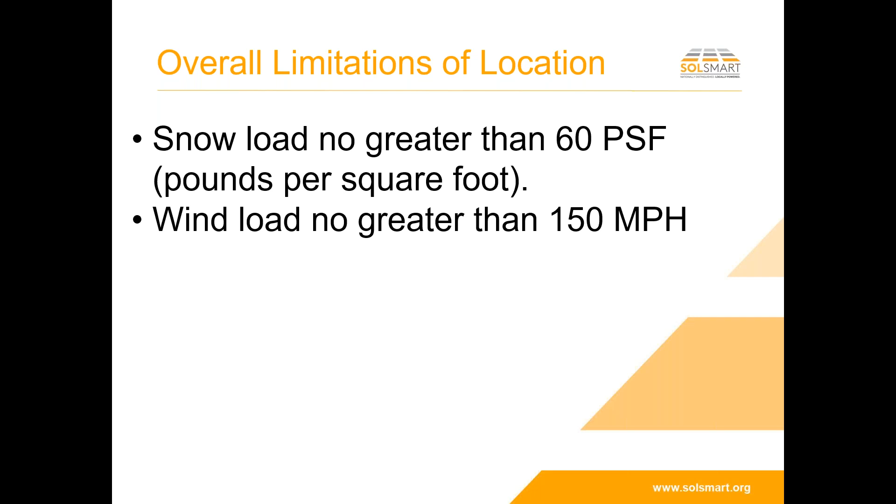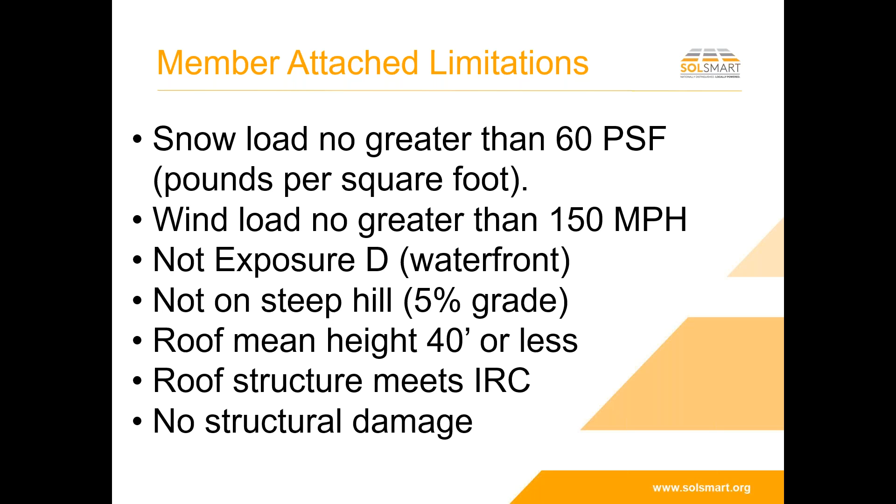The roof structure meets the IRC, which on older construction may or may not be obvious. And then there's no structural damage or modifications that have been made. So a lot of this stuff is structural.

We'll kind of move through this - my intention is not to make you structural engineers or structural reviewers. We may have some structural people on the phone and they'll love this stuff, the rest of you are going to be bored out of your mind. So we don't want to overemphasize it, but we just want to show that structural issues, as most people would think, are a big issue in areas like Minnesota where we get a lot of snow. We want to make sure everybody understands that we have those things covered.

Also, we have wind loading issues - these are member attachment requirements, and this is a checklist. The array is set back from roof edges by at least twice the gap under the module. The gap under most PV modules sold today in the racking systems is about 4 or 5 inches off the roof deck - that's kind of the optimal height. So if you're 4 or 5 inches off the roof deck, you're going to be a minimum of 8 to 10 inches away from the bitter edge of the roof. That's because of wind loading issues - there may be some benefit for icing and things like that, but it's really mostly wind loading issues why we require that, because of some high wind vortexes that happen right at the edges of roofs.

We're also saying that the array can't be cantilevered over the perimeter anchors more than 19 inches. Often we will overhang our rails a little bit over the edges of our last anchor. The perimeter anchors are the ones we really care about from a snow loading point of view, primarily - it's the force of the snow pushing down and how much weight it's going to exert on the rafters or trusses along that perimeter.

All right, now the upslope, downslope anchor spacing, we'll get into, again, some examples to help you understand all this. The spacing of how far apart the rails are that the modules are mounted on is really a function of the module manufacturer's instructions, not the rail manufacturer's instructions. So the rail manufacturer is going to say, hey, they can handle any of these types of modules that are on the market. There's a lot of similarities in solar panels.

And then the module manufacturers will say, well, if you're worried about 50, 60 pound per square foot snow loads, then you have to mount the rails 3 feet apart or 3.5 feet apart. Those are typical numbers. And that you need to have about a 1 foot overhang on either end of the rail, and that will support the module most evenly so that the snow that collects on the panels will not damage the panels.

Now I live in California, and I know people in California don't know anything about snow, and where I live, it never snows. But I just visited snow last week, and I went up to Lake Tahoe, and in the space of 2 days, it snowed 36 inches. So we can get massive amounts of snow, and some of the highest snow loads in the world are near Lake Tahoe. And so snow loading is a real factor, and it certainly is in places like Minnesota where your accumulations tend to continue to collect over time rather than melt away. So we understand that the snow loading is a major factor, and it is certainly in Minnesota.

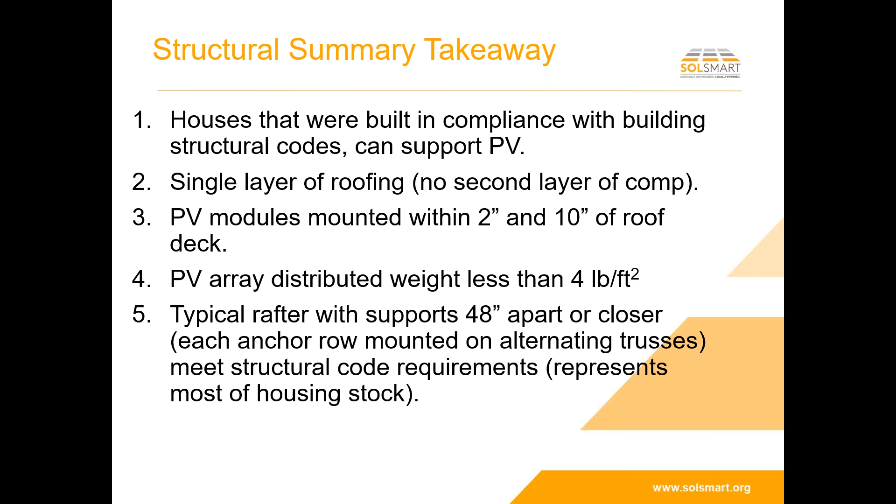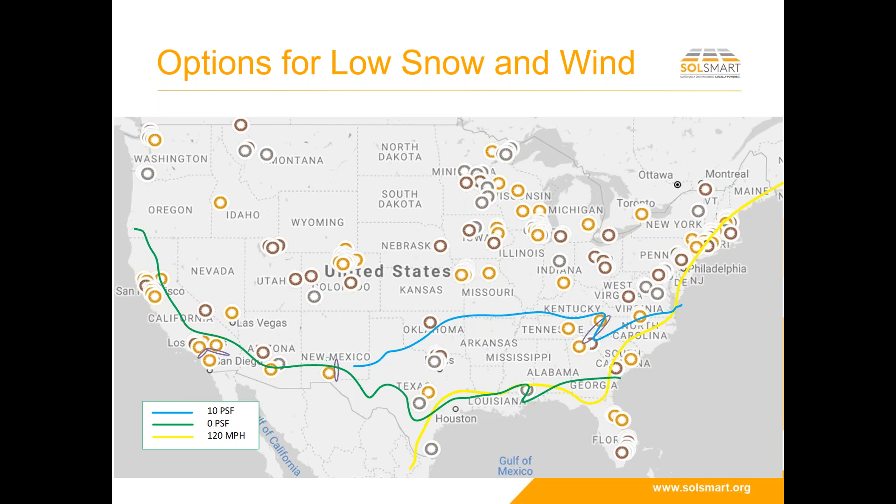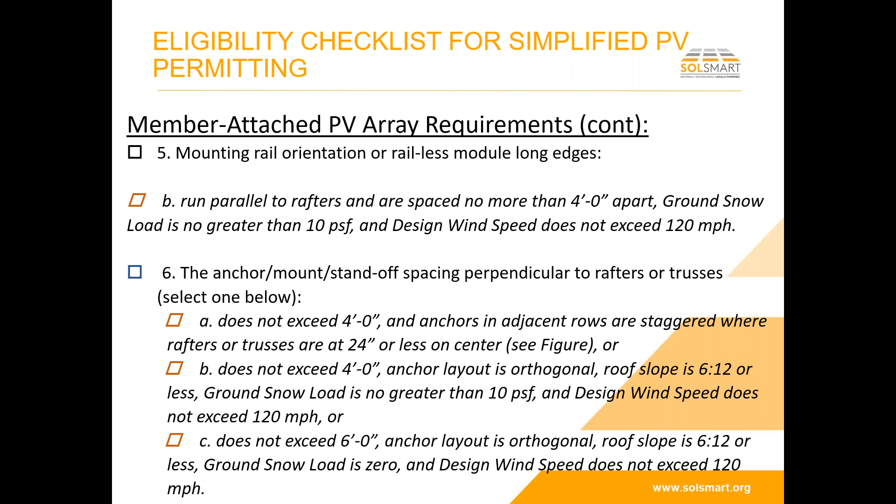The next couple slides I just want to mention, and we're going to move on. There are options in the permitting guidelines for low snow load and wind load areas. Of course, Minnesota would not be considered in that—that's where half of California and the lower part of Arizona and New Mexico fall into that category. These guidelines get into those lower snow load, lower wind load areas, and again, they're not relevant, so I'm just going to skip over them.

I want to talk a little bit about sheathing-attached systems, because they're becoming more and more popular, and we'll see a lot more of these over the next decade. We can handle 60 pounds per square foot snow loads, where the anchors are attached to the sheathing or the roof decking rather than the rafters, going all the way up to 60 pounds per square foot. We back down a little on the wind loading issues, where our roof mean height is a little lower, for wind loading purposes—again, not an issue for Minnesota.

The roof structure, in general, would meet the IRC, as we've talked about before. And if we have manufactured trusses or kiln-dried rafters, then we know the fasteners being used on the trusses are not going to give us any trouble.

There has been some research done in the last decade that suggests using green lumber has caused some issues with the fastening of sheathing, and the code has been revised to clean that up. There is some housing stock out there where green rafters were used, and if the fasteners were number 6, there could be some issues. That's probably not an issue in Minnesota, but again, if you've got a manufactured truss, they're kiln-dried already, and kiln-dried rafters are probably going to be the vast majority of the products out there.

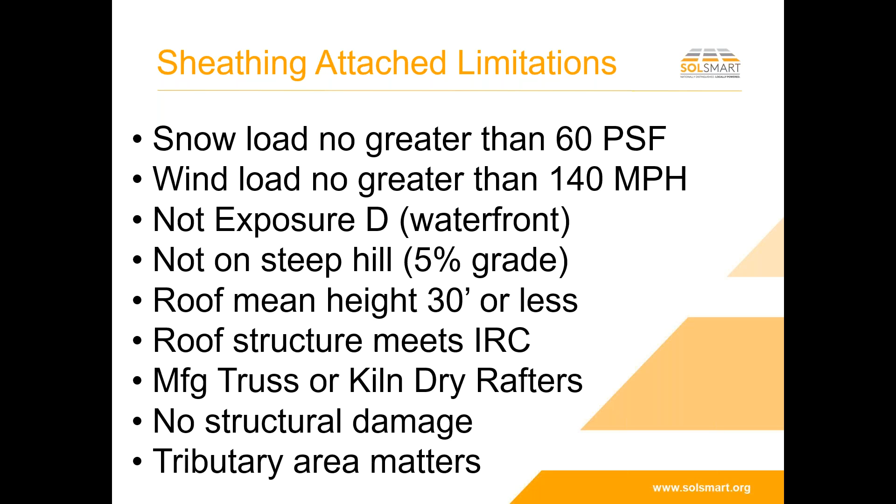There's no structural damage or changes where somebody's modified the structure, and then something called tributary area matters, and we'll go into that briefly without a lot of detail. So sheathing attached systems, for the most part, except in high snow load areas, are going to work for us.

If we look at a sheathing attached system, here we're looking down on top of a house roof with a little gable off the front at the bottom right. What I've shown here is that when we build a roof, we start with full sheets of plywood or OSB, oriented strand board, at the edge of the house, and work our way up to the top, cutting the sheathing at the very ridge.

Measuring from the eave of the roof, we actually know where the sheathing is, and we stagger it as we go up for strength and rigidity. So if we're mounting anchors 2 feet from the bottom edge of the roof, we're right in the middle of a 4-foot by 8-foot sheet of plywood, since these sheets are installed in what we'd call, for paper, a landscape fashion.

If you're in that area near the edge of the roof, that's the strongest part of the sheathing. It's virtually impossible for a system to stay in those bands of strength all the way up the roof unless specifically designed that way. This shows rows of anchors across the bottom here, these little dots. The second row is in bands of strength, but the third row is not. The bands of strength are the middle 16 inches of the 4-foot dimension of a 4x8 sheet of plywood.

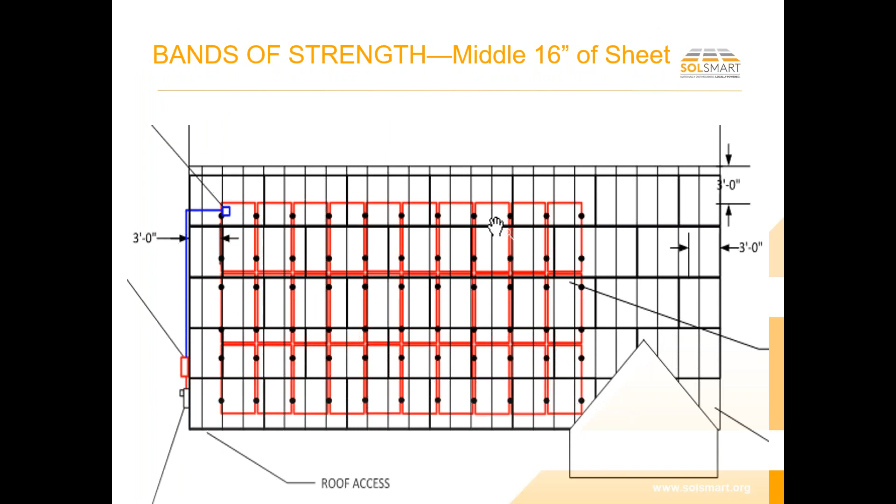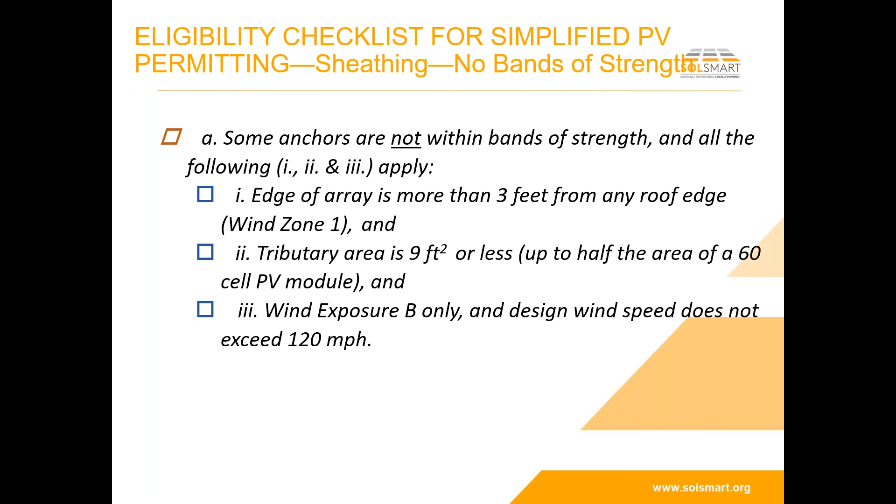If we're not going to pay attention to bands of strength at all, when I mention bands of strength and talk about that middle 16 inches being stronger, the middle 16 inches is about twice as strong for wind uplift than the edge of the sheathing. So twice as strong doesn't mean the edge has zero strength, it just means it's half as strong. With that, we're not going to want to go above 120 miles per hour, and we're going to focus on wind exposure B, which would be residential, suburban, metropolitan areas in general, not houses in the middle of a field or on the waterfront.

Now, if we pay attention to bands of strength, we can be a little more liberal in our exposure characteristics, and we can handle a little more weight and things like that. So that's just what that's talking about.

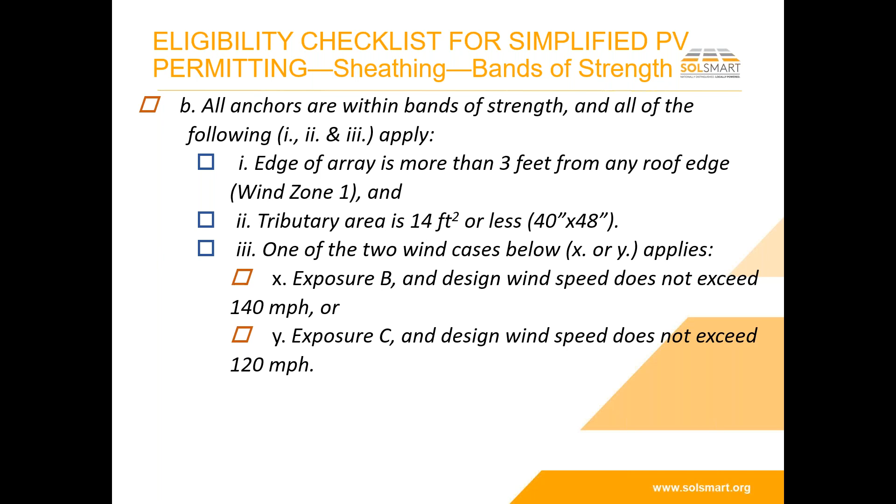Our anchor sheathing connection has an allowable stress design uplift capacity of 166 pounds under short duration loading, which corresponds to an ultimate tested uplift capacity of 520 pounds. So when we do testing on these anchors, they have to be able to handle an ultimate strength of 520 pounds of uplift force, and we take that number and divide it by 3, and that's sufficient.

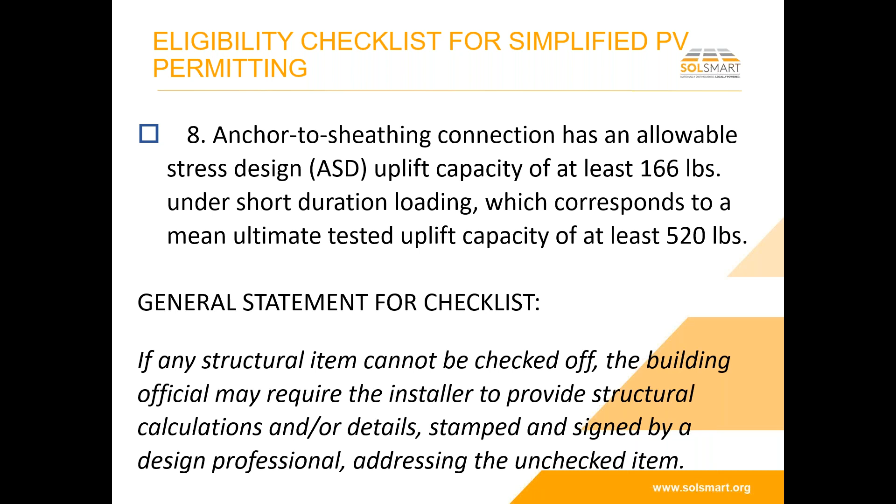We also have the general statement on all our structural stuff that if any structural item can't be checked off, the building official may require the installer to provide structural calculations and or details that are stamped and signed by a design professional addressing whatever the unchecked item is. So as we go through the checklist, if there's an item that's unchecked, maybe it's a fairly simple evaluation they can do and just write a letter that says that in this particular situation, that item is covered by the overall design.

Let's talk about the electrical system requirements for a moment. These are quite a bit simpler than the structural, and I've been working on the electrical side of this stuff for over 30 years, my entire career, and things have gotten a lot simpler and more straightforward over the years. A lot of it's been based on the fact that we have listed equipment for virtually every piece and part used in PV systems, including the mounting hardware, the inverters, the solar panels, and any of the electronics. So that's number one, the major electrical components are all listed and identified for use in PV systems.

The array mounting system is going to be grounded according to the grounding standard UL 2703 certification for bonding and grounding, and that makes it much easier. It's a very simple way to ground and bond PV systems, but they have to have that certification. There are probably five dozen products on the market today that have these UL 2703 certifications, so it's just a matter of verifying that certification has been achieved for that module and rail combination. The way that works is the rail manufacturer provides certification that they've tested it and had it certified to UL 2703 for X number of modules.

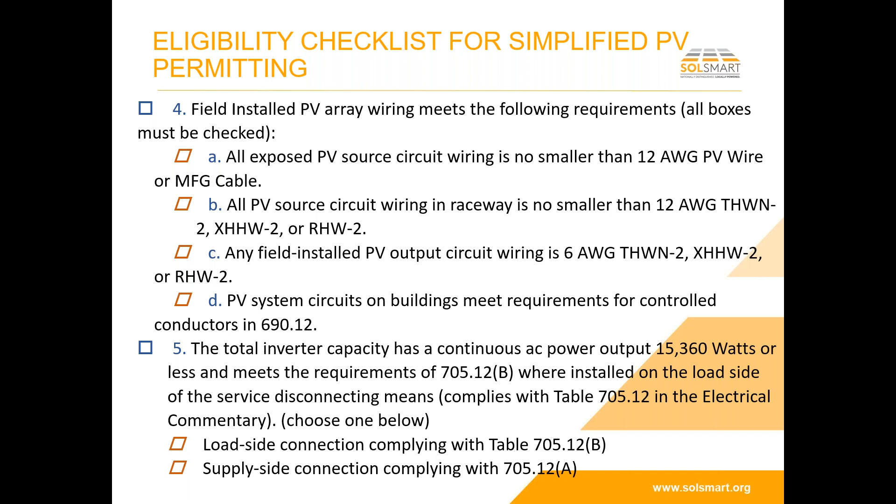Equipment is rated for the maximum DC voltage, and we talk about the ASHRAE mean extreme minimum dry bulb temperature. I give you a reference for that, from the old permitting guideline I did for the Solar America Board for Codes and Standards about 10 years ago, and that document and temperature resource are still on the web.

Let me tab over to that real quick and show you. Let's open this up here. Here we have the Minneapolis International Airport, and the mean extreme minimum dry bulb temperature according to ASHRAE is minus 28 degrees C. That would be used in this document if you were doing a project in the Minneapolis area.

If we choose another area, we pick another location. As you move north, it gets a little colder, minus 31 degrees C. Let's go to Duluth—we've done some projects there, and it's actually about the same as Minneapolis because it's near the water. If we go further north, you can get into some really cold temperatures. I don't need to teach anybody from Minnesota about cold temperatures.

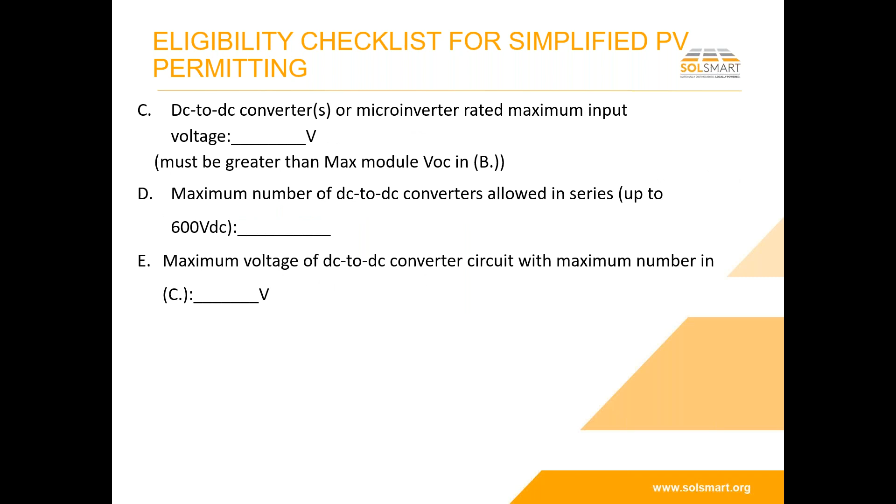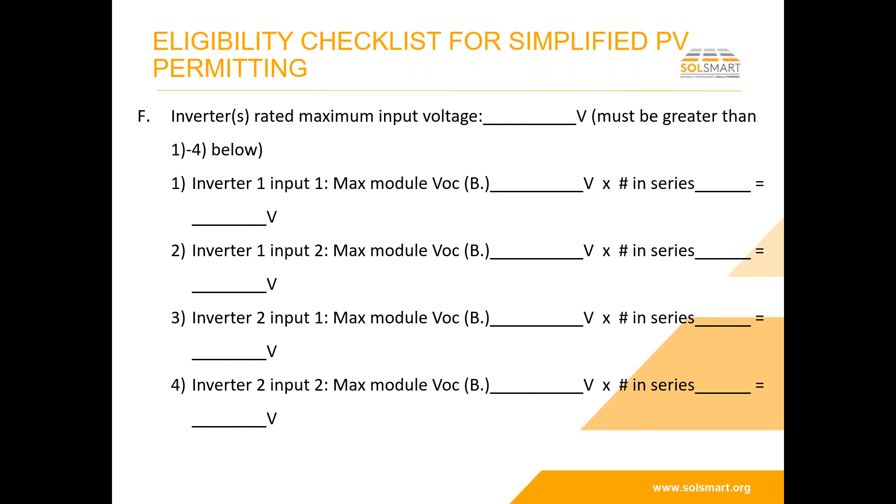Your voltage increase is typically about 20% in the wintertime, and you definitely need to account for that with DC converters if the system has them, and also for a series group of modules going into various inverter inputs—since you could have several inverter inputs with a different number of modules into each. We have a way to fill that out in this worksheet.

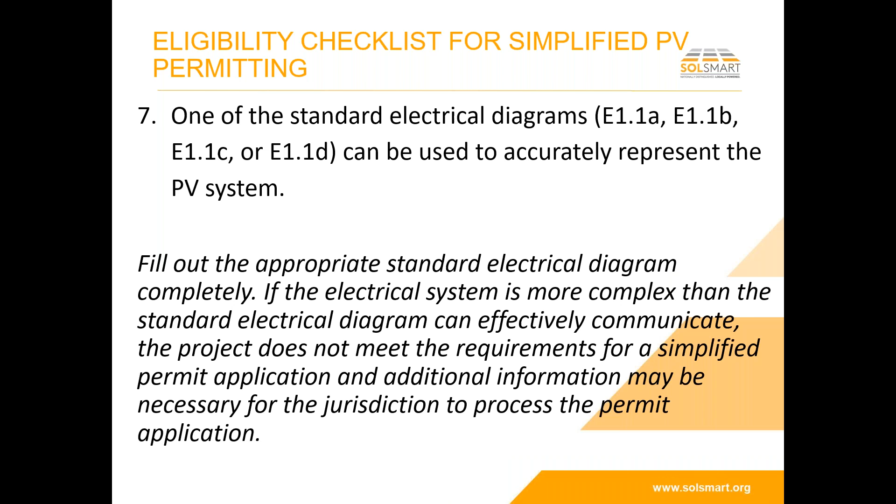And then we have standard electrical diagrams that we'll show you in a minute here before the end of our training today. So let's talk about an example.

That example would be a 7.6 kilowatt central inverter system with American Solar—these are all fictitious companies. 360 watt modules with a 7.6 kilowatt inverter and a racking system that's UL 2703 rated. The roof pitch is only 4 and 12, fairly low pitch, and the house was built in 1988, tract home kind of thing. So let's look at what that might look like.

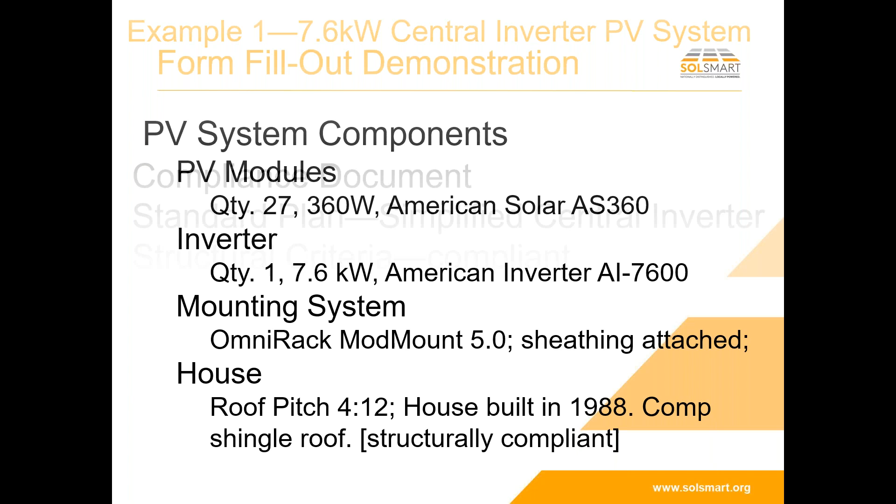So this is not a particularly large system. The code today, the residential code, would allow us to take this all the way up to 18 inches from the ridge of the roof, since this array is less than 1/3 of the overall roof area. So the IRC residential code, 2018 residential code, would allow us to go within 18 inches of the roof. That was unnecessary on this system, and we are able to stay within 36 inches of the peak of the roof. So that's the sheathing attached system.

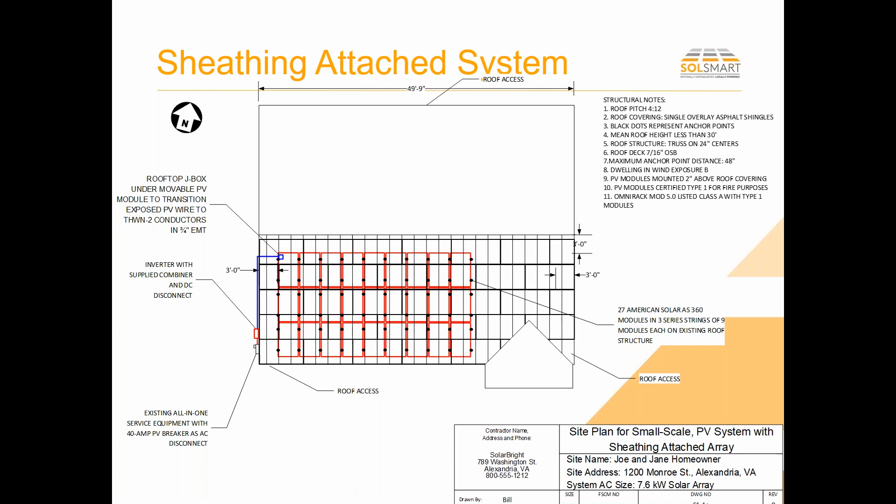Now, the only reason that would be an issue would be if the inverter was rated for only 500 volts, that would be a problem. This particular design would put it over the 500 volt number. However, 600 volts is a more common maximum voltage for inverters. So a 600 volt inverter would be fine, a 500 volt inverter would not be fine. So that's a good case in point why temperature matters.

Rather than going into a whole other example, I wanted to stop here. We got about 5 minutes left, so let's pause and see if we have any questions. I know I've covered a lot of material here. See if anybody had any questions they'd like to ask about something I said that maybe didn't agree with, or didn't like what I said about Minneapolis being cold, something like that. I'd like to just answer some questions if we have any. Cameron or Dave, do we have any questions out there?

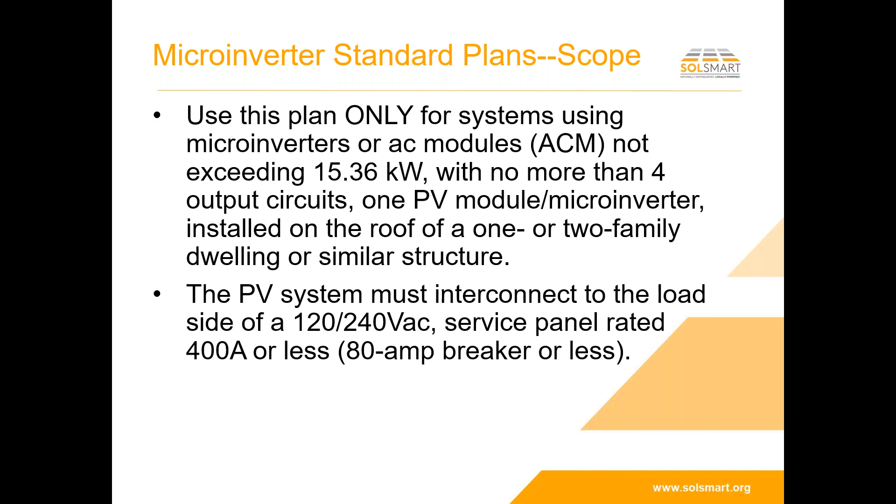So we have a checklist on here, and these resources are available, and I'm available to help any communities that are working through these things, that have questions. We have commentary documents that are part of this website that you can download and that explain the permitting worksheet. So great question, and thanks for that. And I think we're out of time today, and we're going to pick this up tomorrow and finish out our permitting stuff, and then talk about field inspection.

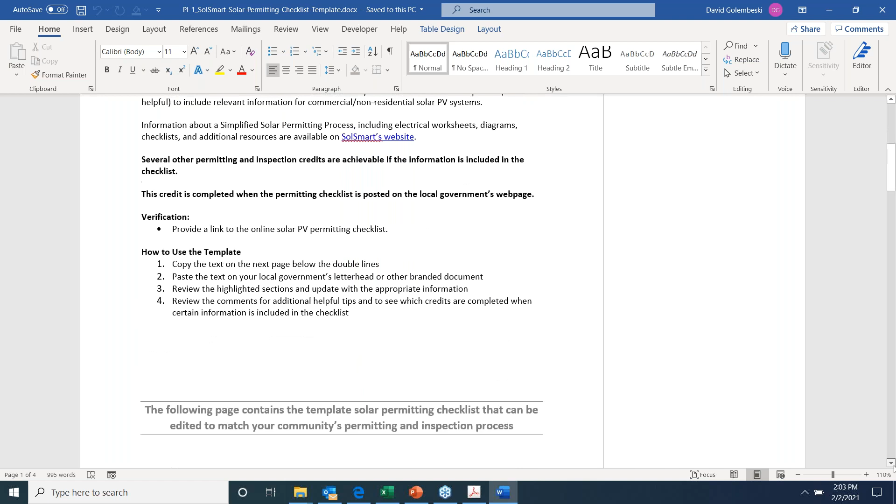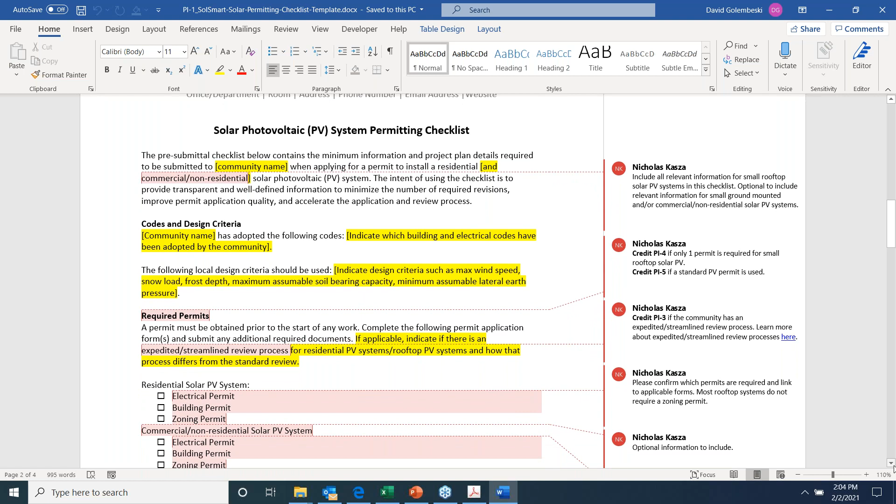We also, SolSmart just recently released a template for public facing about what are the required permit submittals and steps for a community's process. And that is a credit to reach SolSmart designation. So we put together a template checklist that a community would use and adapt to meet their permitting process. This is online on the SolSmart website, and this is something you would adapt to your community's process. So if you require an electrical or building permit or a zoning permit, you just tailor to that. And we've listed out some of these required documents that Bill has gone over for a simplified permit system.

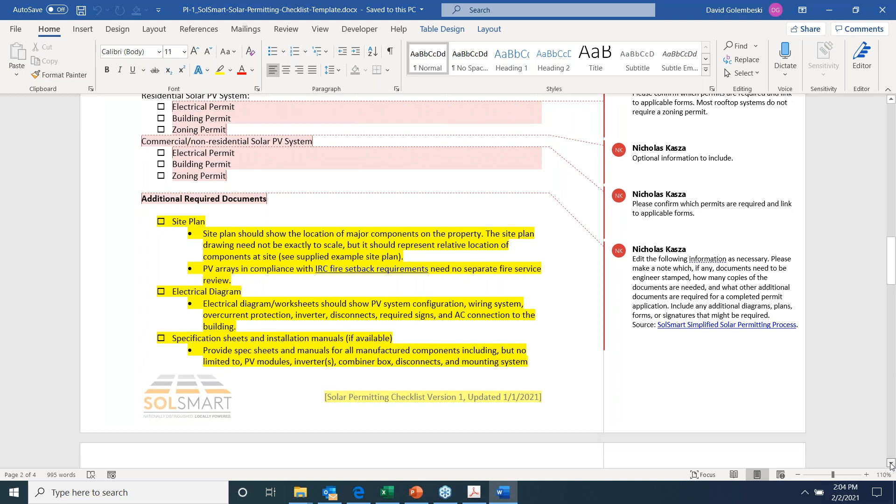So I think this is a great resource. That is on the website, and we can send around these resources to all the folks that have attended, send links to those.